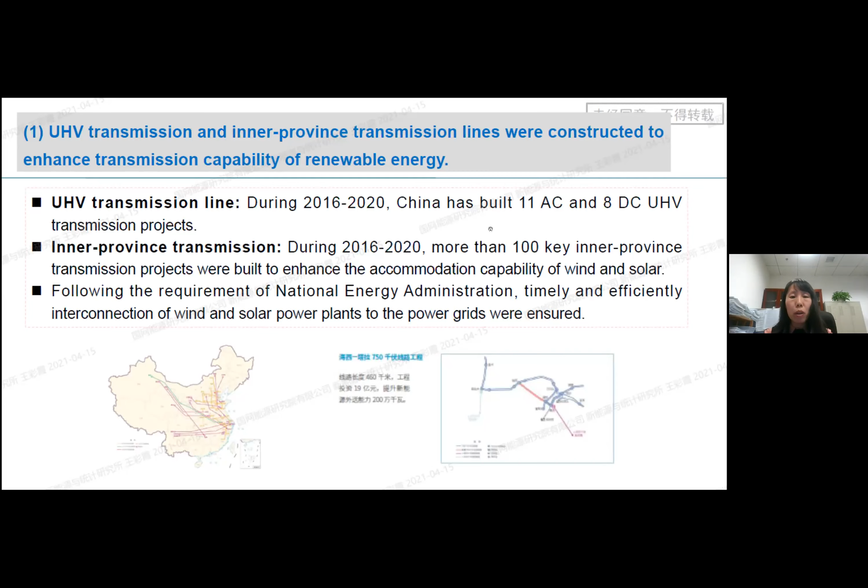Now, by the end of 2020, 51% of wind are located in North China, East China, and Central China. And for solar, this share is higher: 64% of solar is located in North, East and Central China, which are the load centers in China.

The energy share of wind and solar in China by the end of 2020 is 9.5%. Actually, this share is higher in the State Grid operation area. In the State Grid operation area, this share is 10%.

In 2020, the utilization rate of wind and solar has reached 97% in China. Actually, this is a big improvement from the conditions 4 or 5 years ago. In 2016, we had very severe wind and solar curtailment in some provinces in China, especially Xinjiang and Gansu.

And in 2020, this condition has improved a lot. For the first time, the wind and solar utilization rates in Xinjiang and Gansu have reached 90% and 95% respectively, and this was 80% or even lower 4 or 5 years ago. Now the wind utilization rate is 97%, and for solar it is a little bit higher, 98%. So the above is the current status of renewable energy development in China.

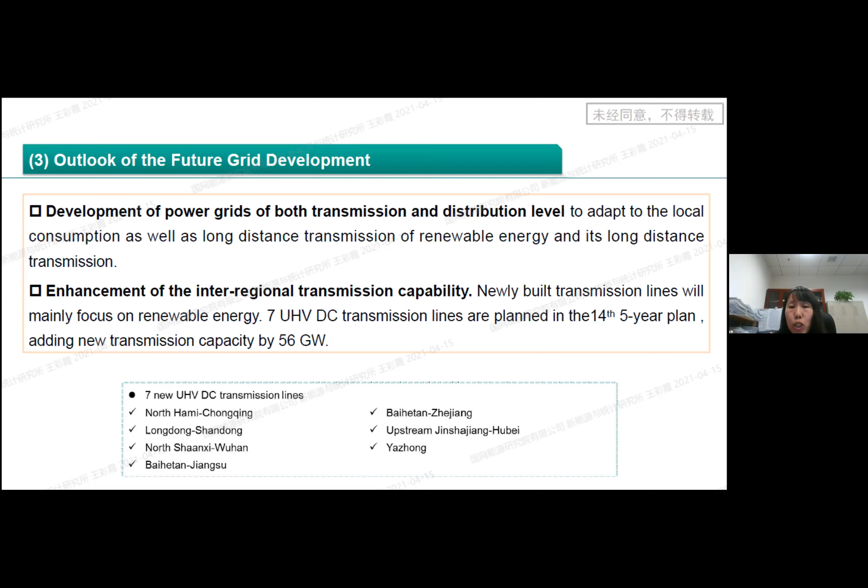We look at the market in 2 aspects. One is the interprovincial electricity market, which is to trade renewable energy in a larger scale. In the SGCC area, the total amount of wind and solar traded in the interprovincial electricity market in 2020 was 91.5 terawatt hours. It's mainly traded in the long-term market, and a very small portion of them is traded in the spot market for renewable energy. So the long-term market here in China is mainly the yearly, seasonally, monthly market like that.

And the other part is a provincial electricity market. And we have around 95 terawatt hours of wind and solar being traded in provincial electricity markets in 2020. So it's mainly through direct trading between renewable energy and electricity consumers, and through generation rights trading between thermal generators and renewable energy.

For future power grid development, as we all know, President Xi announced that China will aim to have CO2 emissions peak before 2030 and carbon neutrality before 2060, and we will have wind and solar capacity of over 1,200 gigawatts by 2030. So we can anticipate that in the future, there will be faster and larger scales of renewable energy development in China. Of course, this will bring challenges to the power grid.

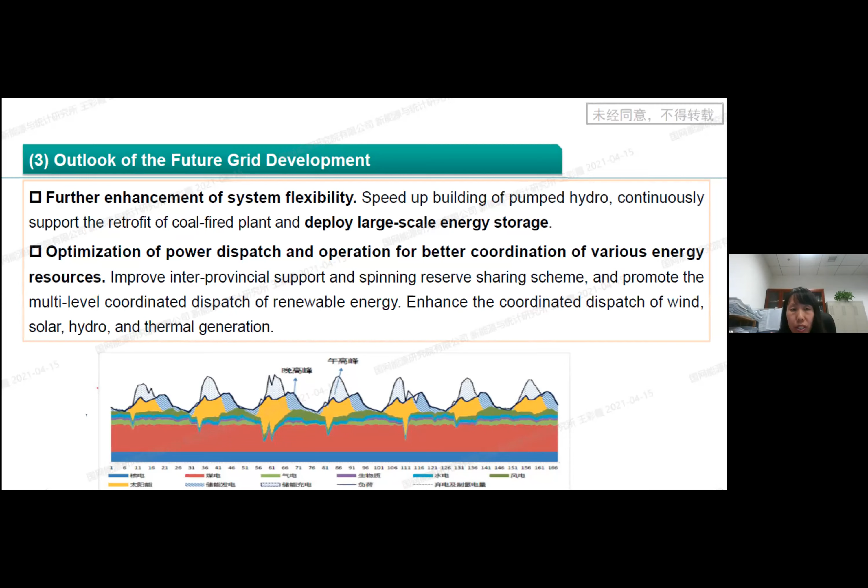Here, I summarize those challenges in 3 aspects. One is to ensure the secure supply of energy in the system. As we all know, wind and solar have this characteristic of variability, right? And in recent years, we have had some extreme weather, so we have extreme high load during the summer and winter. So how to secure supply of energy is a big issue.

And so the second challenge is to ensure the security of power system operation. And the third one is to ensure efficient utilization of renewable energy. Can we also guarantee 90% or 95% or higher utilization rates of renewable energy in the next few years? So this is also a big challenge.

For the future power grid, actually, the State Grid published its action scheme on how to achieve the 30-60 goal in China. And some of those future power grid development aspects I put here are in that scheme. One is the development of power grids at both transmission and distribution level to enable the local consumption of renewable energy as well as long distance transmission of renewable energy.

Second is enhancement of the inter-regional transmission capability. Actually, 7 ultra-high voltage DC transmission lines are already planned in the 14th five-year plan, and this will add new transmission capacity to the system. And the third one is to support the development of distributed energy resources and microgrids, as we could also anticipate in the future, distributed renewable energy will be a big part of the renewable energy future. So the power grid should enable them to be utilized in a more intelligent way in the system.

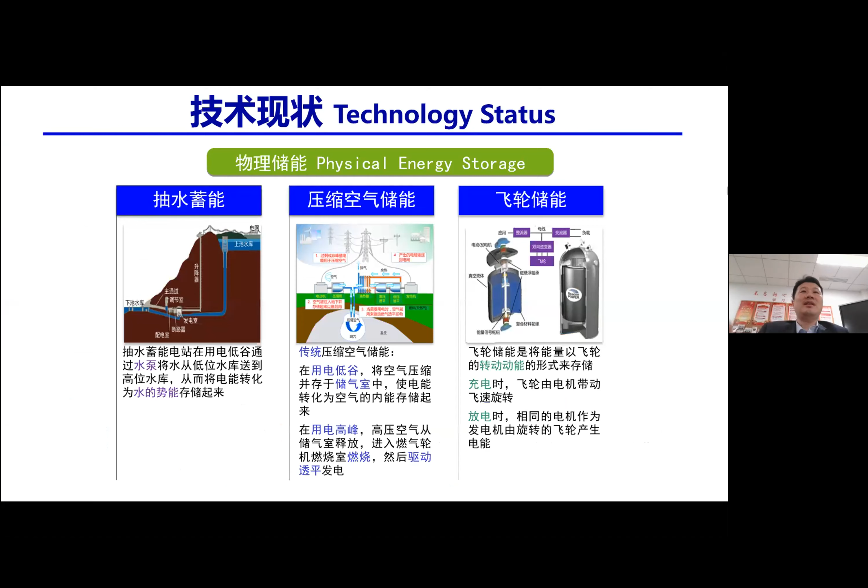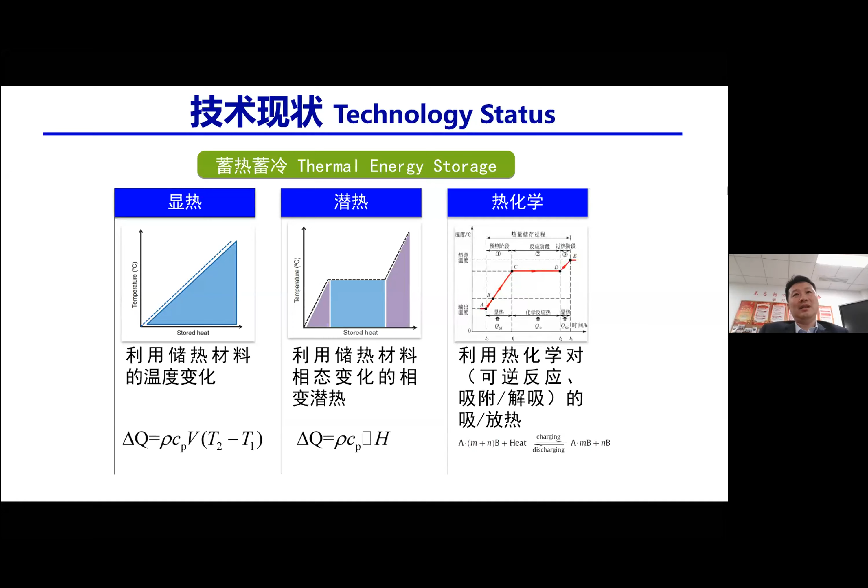So I will deliver my presentation in Chinese. There are 5 parts in my presentation: introduction, technology status, application status, and also the development trend in China, and then some concluding remarks. So first, the background information of energy storage. This is the definition of energy storage. Energy storage, by its name, refers to a process of storing energy via some medium or devices.

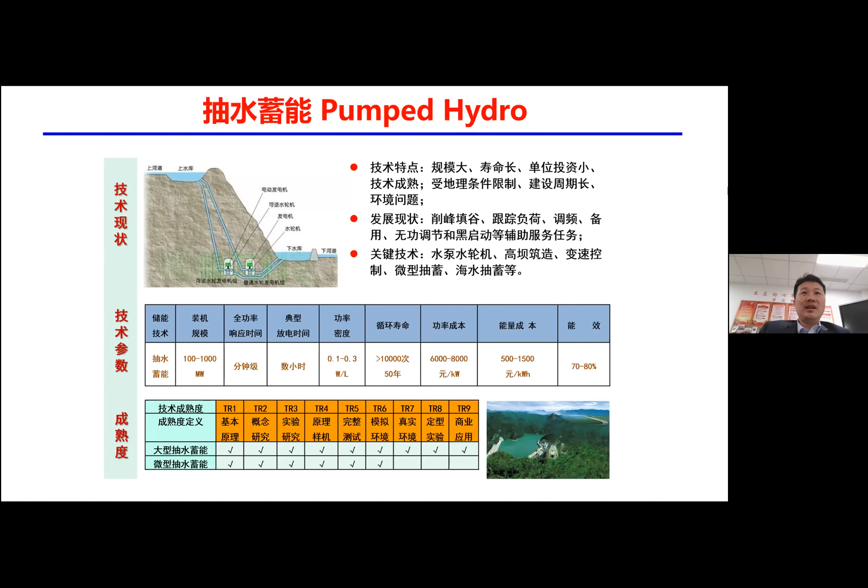Energy storage has a broad and also narrow definition. In the broad sense, it refers to all forms of energy. And more specifically, for electricity storage, there are 2 types of technologies: physical and chemical. For thermal energy storage, it refers to 3 types of heat storage: sensible heat, latent heat, and chemical heat storage. Needless to say, energy storage is very significant. It's a technology of strategic importance.

We know that since the 3rd industrial revolution, with the introduction of renewable energies, we will see higher demand and need for energy storage. First of all, we have more mobile devices, which will create huge demand for energy storage. In the past decade, globally and also in China, the number of mobile devices has been growing exponentially. Over 10-fold increase was witnessed in the past decade. So this created huge demand for energy storage.

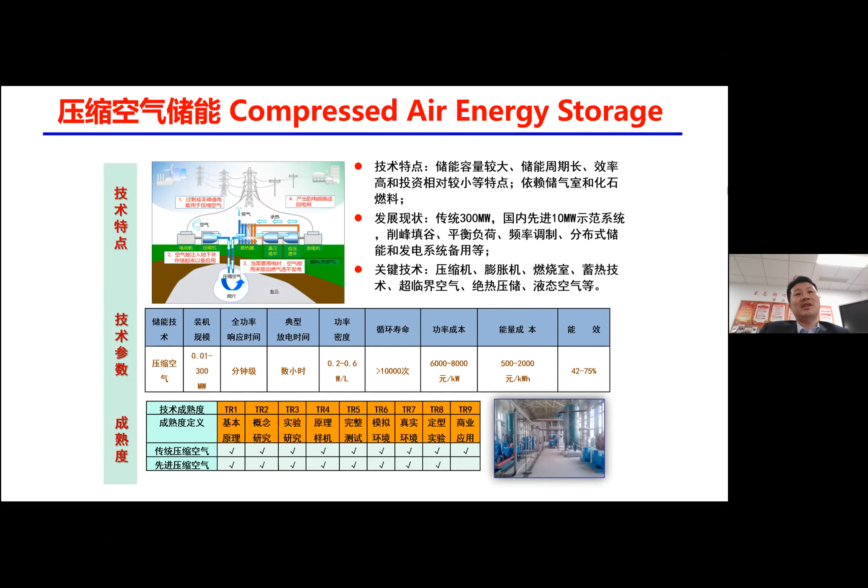Second, electric vehicles and also electric bikes, scooters. Those new devices in the transport sector also increased by a factor of 10 in the past 10 years. Third, the rapid expansion of renewables. In the past 10 years, we have seen the pumped hydro energy storage technology demand also has remarkable progress.

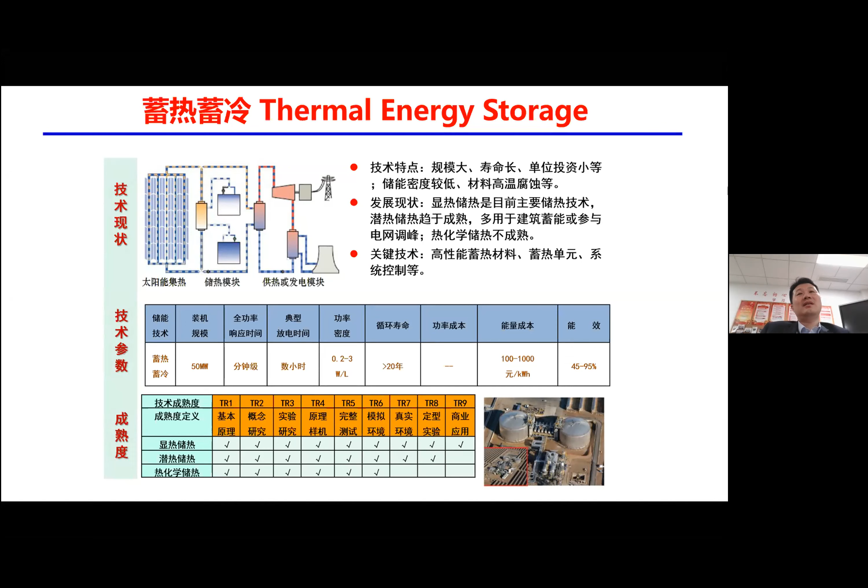Together with the rising installed capacity of renewables, there is an ever-growing demand for energy storage technologies. There are different predictions. I won't go into all the details, but based on different sources, the demand for energy storage technology will grow by over 10 times before 2030.

The technology status in China: these are the physical energy storage technologies, so they don't involve any chemical reactions. Here there are 3 main types of technologies: pumped storage, compressed air energy storage, and flywheel. For chemical technologies, it involves lead-acid batteries, lithium-ion batteries, sodium-sulfur batteries, and liquid flow batteries. So they can be applied to sensible heat, latent heat, and chemical heat storages.

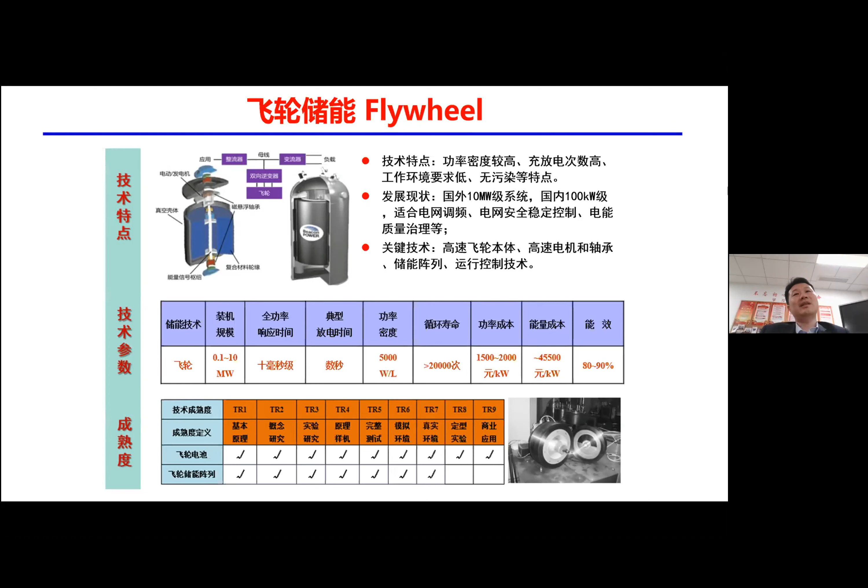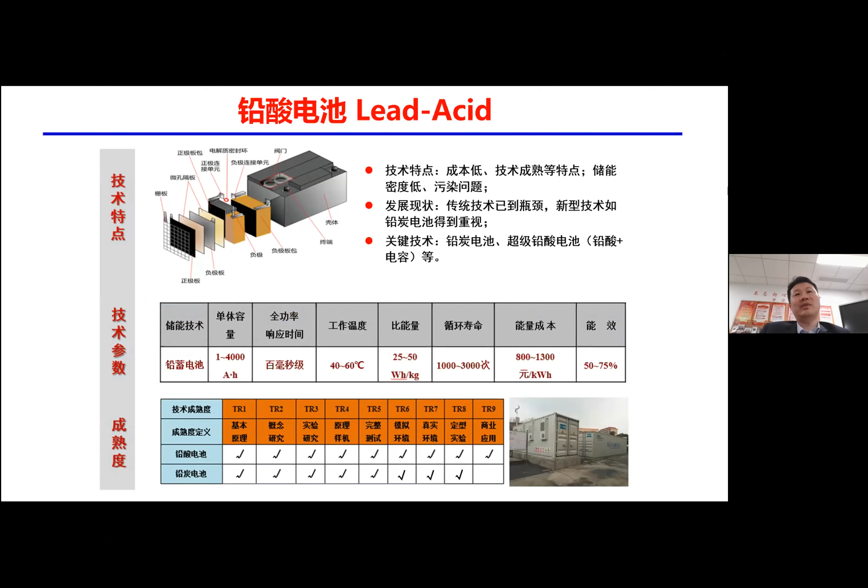The second major category of technologies, compressed air. The benefits: large storage capacity, high efficiency, relatively small investment. The drawbacks include the consumption of fossil fuels and also the dependency on air chambers. In China, we have some demo projects on 10 megawatts. We are piloting 100 megawatt level compressed air energy storage. It is estimated that by the end of this year or early next year, we will be able to launch the first demo project for compressed air energy storage at the 100 megawatt level.

For thermal energy storage, again, large capacity, longer usage life, smaller unit investment. The weaknesses include lower energy density and also high temperature erosion of materials. In China, we see some applications in construction projects for heat storage and also cold storage in southern China. And right now, it's primarily being used for sensible heat and latent heat. We have some mature application cases and also some demo projects. Chemical heat storage is still being studied.

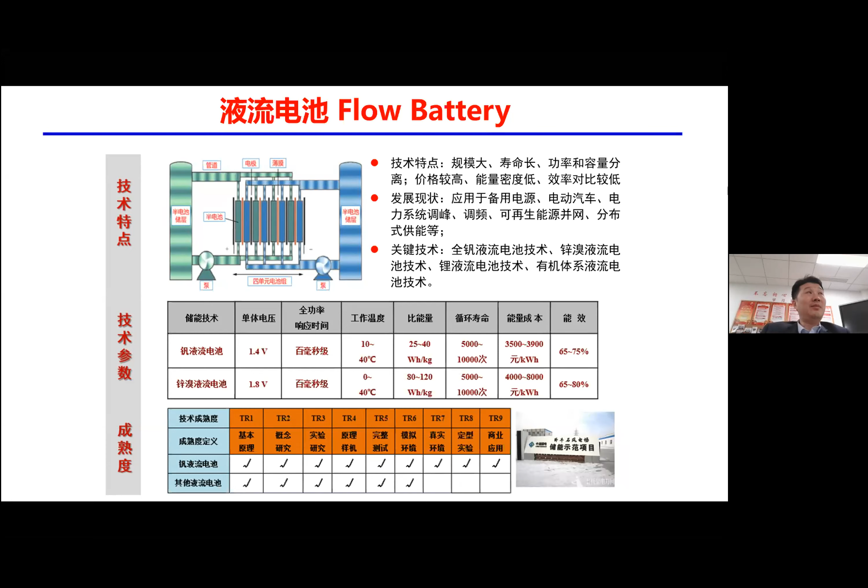Flywheel is a totally different physical energy storage technology. The benefits include high power density, higher number of charge and discharge cycles, lower environmental requirements for operation, and low pollution. Drawbacks: there is some energy loss, because when the flywheel spins, it will reduce energy efficiency.

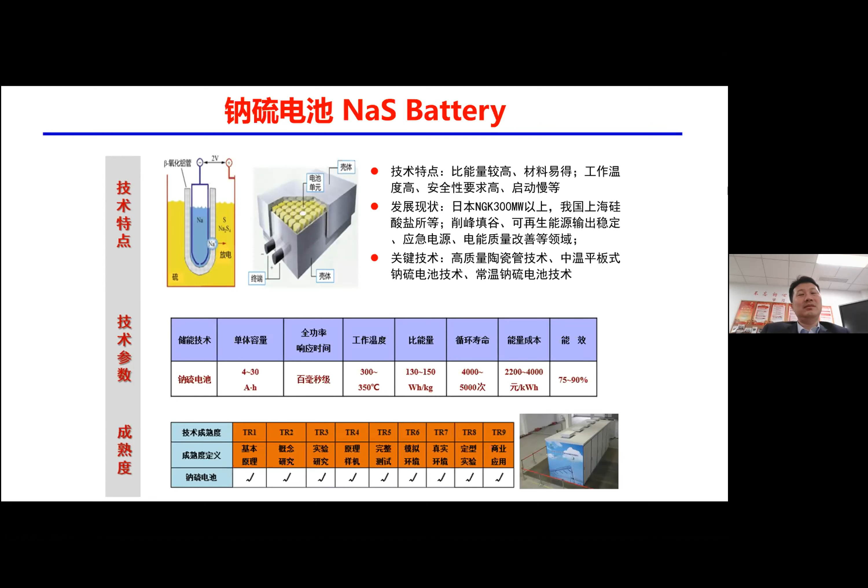For lead acid, the benefits are low cost, mature technology. Weaknesses include low energy density and potential pollution. In the future, China will need to focus on reducing its pollution footprint while enhancing its energy density.

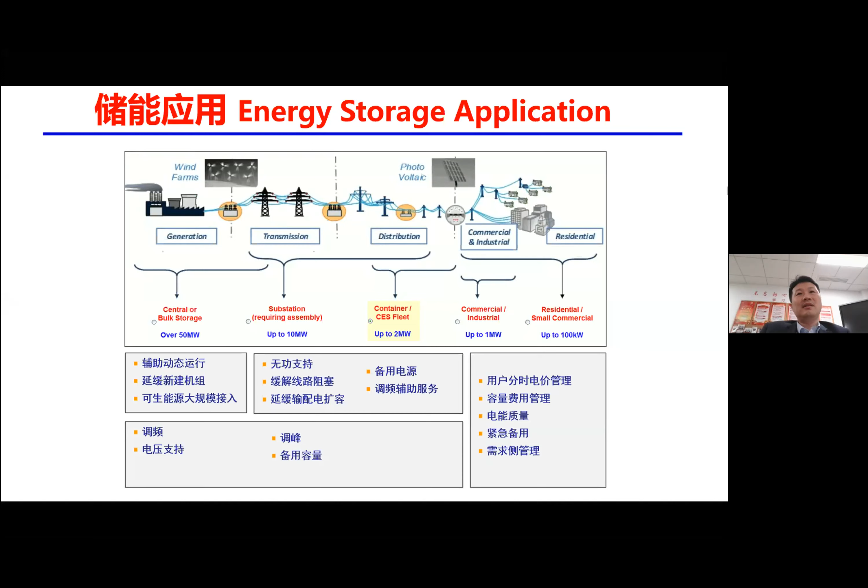Lithium ion, another very mature technology in China: high energy density, efficiency, and quick response time. Drawbacks include high cost and also safety. In China, we have 10 megawatt grade applications. The highest one is around 30 megawatts for demo projects.

If we apply the distributed model, then combined, they can reach 100 megawatt level. For a flow battery, we are also seeing different types of liquid flow batteries in China. The benefits: large capacity, and also long usage life, higher power, and also higher capacity. But the weaknesses include high cost, since it involves rare materials.

So in the future, China will need to work on reducing the cost of vanadium. In China, we already realized the 5 megawatt and 10 megawatt vanadium flow batteries in Liaoning province and also in Dalian city of China.

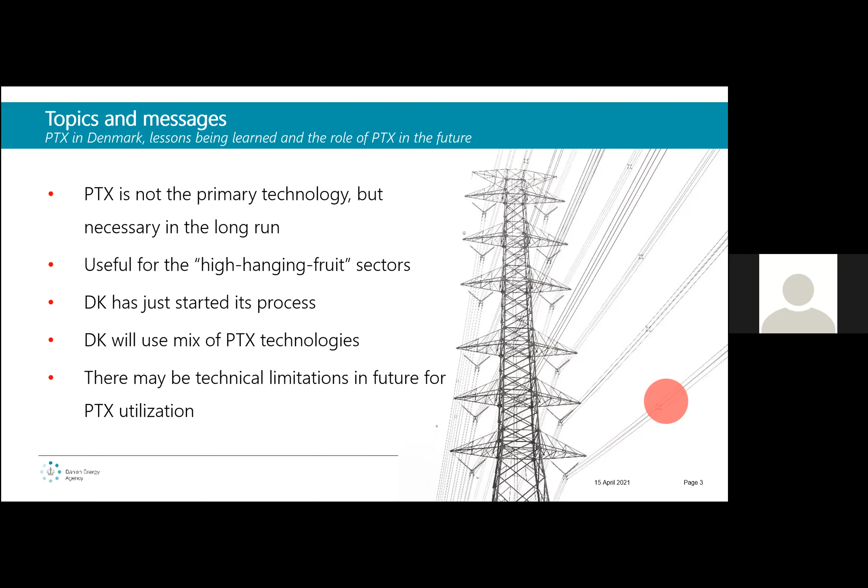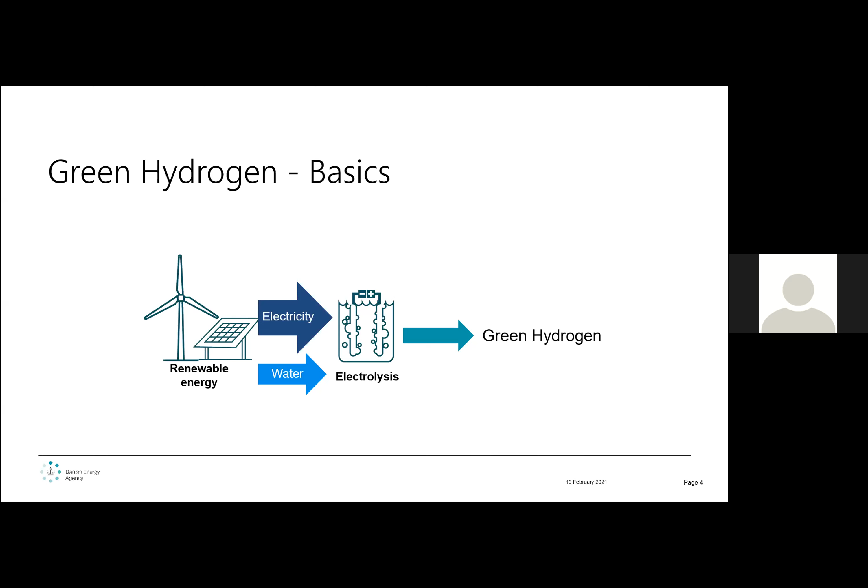Well, thank you very much. We just have to start video. I'm not allowed yet. And as per usual, we just have to get it up. Just for a second. I think you should be seeing my screen now. Can someone please confirm that for me? We can see it, Gregers. That's good. And I presume you can see my face too? Unfortunately, not at the moment, only on slide 2. Okay. I think I'm having a bit of a Zoom issue that happens at times. Give me just 1 second. Gregers, would you also be able to switch to full screen? Yes, I am trying. Can you see my face now? No, I'm afraid not. Okay, we'll do it without my lovely face. You will have to do with slide 2. But do you see my screen in full screen? I do not here in Beijing. It's still not full screen. Should be better now. Perfect now, yeah. Yes, thank you. Apologies.

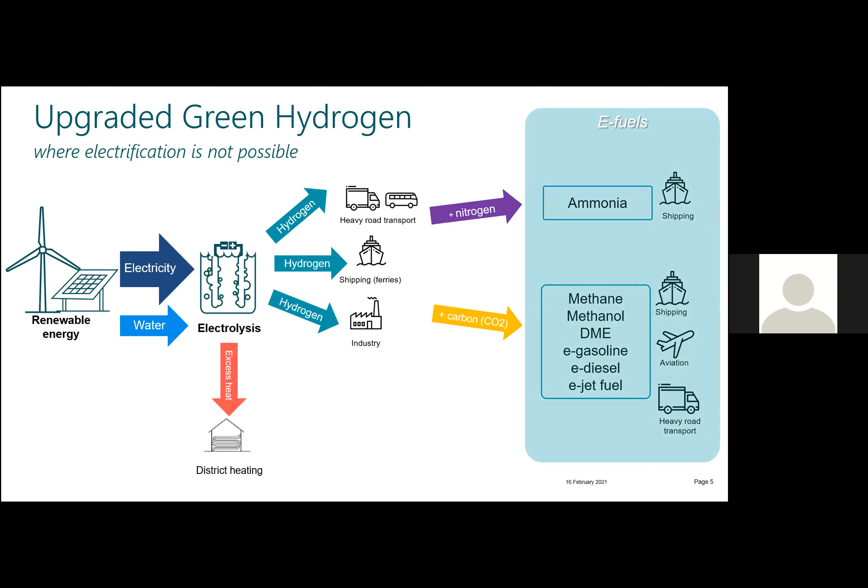Nǐmen hǎo. I am, as Sune said, Gregers from the Danish Energy Agency. And I will speak a little bit to the Danish PTX strategy concerning mostly electrolyzers and how to use that on the demand side. So just to be upfront, the top message is that Power-to-X is not a primary technology. It's not what we are most concerned about, and neither do we think we should be, but it is a necessary technology in the long run. And that is because it is useful for the high-hanging fruits, where we are usually talking about energy efficiency and direct electrification as being lower-hanging fruits that should immediately be changed. There are some sectors, which I will cover in a second, that are much more difficult, and that's where PTX is really a useful technology.

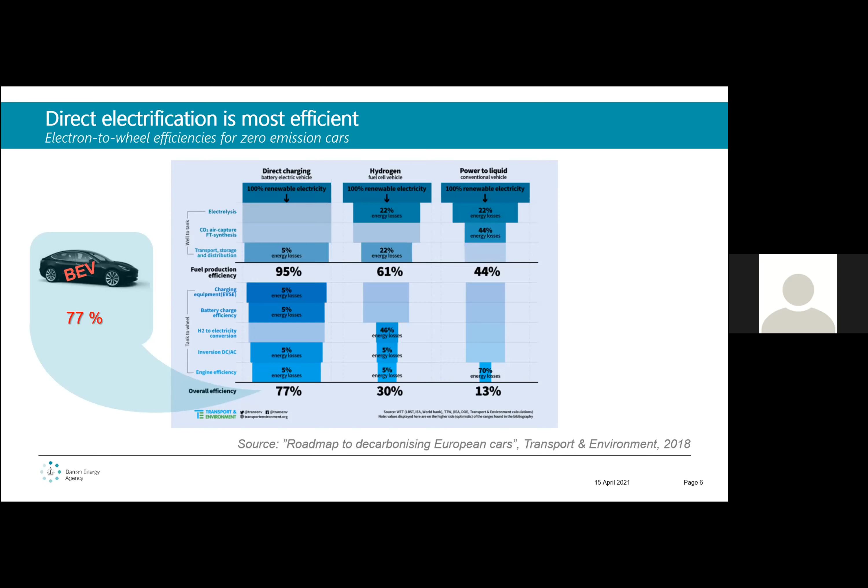And as it is new almost everywhere internationally, Denmark has just started this process, and what is being done, I will cover in these slides. And I will also cover how we are using 2 primary technologies, where there has been a discussion mostly between the EU and China on which one should be used. And the Danish interpretation is both, but we'll get to that. And then we will also talk very shortly about some of the technical limitations of PTX utilization in the future. So let's get into the details.

So just to cover the basics, when we are saying green hydrogen, we are talking about renewable energy, specifically VRE. Sorry? I think someone is not muted. It's okay.

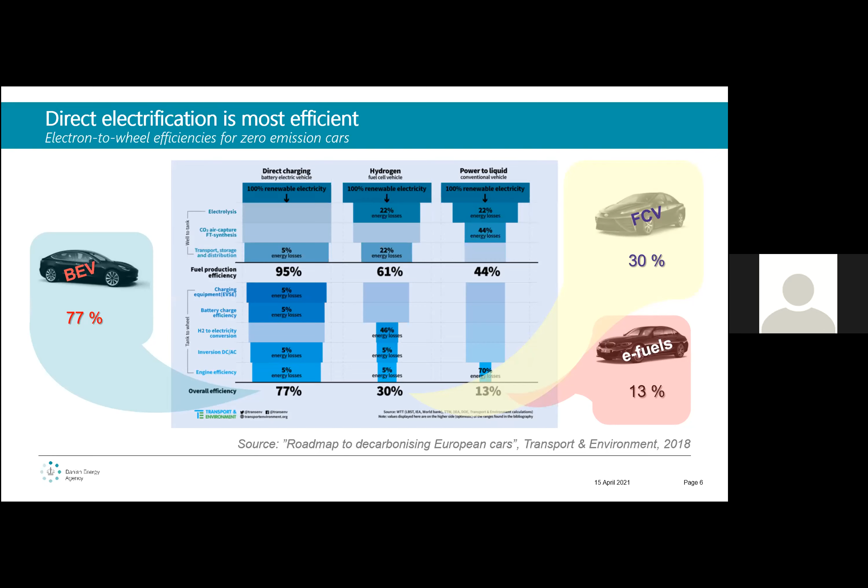That uses water and electricity, of course, through some type of electrolyzers to produce green hydrogen. And that green hydrogen can be used for both heavy transport and shipping, mostly in very short distance shipping. There are a lot of industries that can directly use it as energy, but also as an alternative to natural gas or even coke in some heavy industries. And then electrolyzers, fortunately and unfortunately, produce quite a lot of excess heat at about 80 degrees. So that is useful for excess heat district heating.

And furthermore, having this pure, high quality hydrogen, we can mix that with nitrogen to create ammonia, which is very useful for long distance shipping. And we'll get into that; Denmark has a special interest. And also we can actually mix that with existing CO2, meaning carbon dioxide, to produce e-fuels such as methane, methanol, DME, and different kinds of fuels similar to fossil fuels, but actually made green. And these are generally spoken of as e-fuels. So that is where the situation is in terms of the technology and its usefulness.

And the reason why we are not full in, or we don't consider PTX as the most primary technology, is because we have a high difference in end-to-end efficiency. If you take something like cars, we have battery electric vehicles, as you are well known in China, they have quite high efficiency end-to-end because of the overall efficiency of just producing electricity and transporting it directly into a battery with few losses. So the overall, we could say, electron-to-wheel efficiency is about 77%, assuming 100% renewable energy.

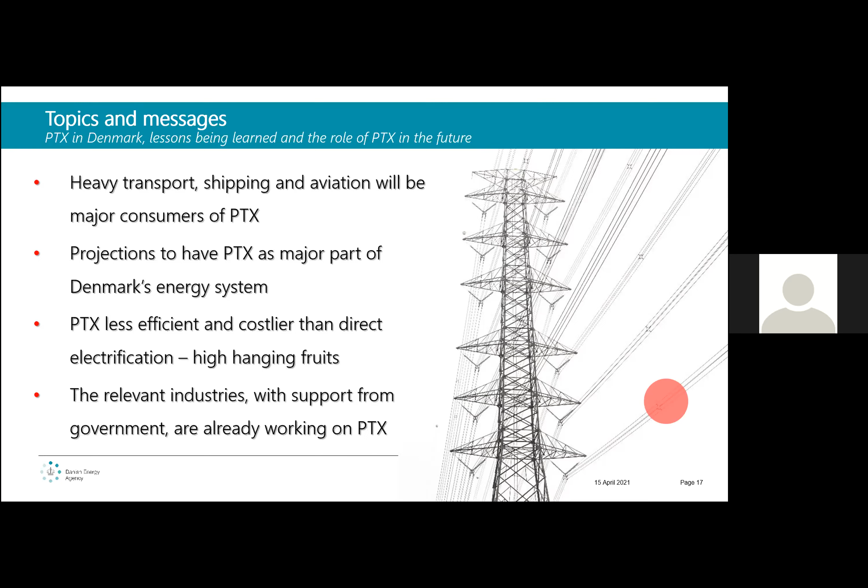We have Shell oil company wanting to make further investment into PEM for use in refining, simply making green fuels in an already existing refinery spot near good power lines. And then we have some local PEM for transportation, mostly big transportation. And then of course Ørsted and Partners that for now will make a 2 megawatt electrolysis for transportation and are further expected to invest quite a lot. And all of these are government supported as of now, because it is a new market, of course.

So ambitions in Denmark: PTX will grow to become a very significant sector in the industrial and fuel sector. And so you see, as we are where we are in 2021, we haven't actually laid ground for the first PTX industry yet, but that will come in 2022 and 2023, and it is expected to grow very rapidly until 2040, where our analysis goes to. For reference, in 2030 that's 1 gigawatt of electric capacity, and in 2040 it's 3 gigawatt of electric capacity. And in 2040, the electricity demand from PTX alone will constitute what in today's terms would be about 8% of the total energy consumption in Denmark.

Now, of course, this seems quite large, but we have to remember this will also supply quite a big part of Denmark's energy supply for heavy transportation and shipping, which then puts it into perspective as being a quite useful technology, and will replace especially heavy fuel oil and diesel in the system. So we're quite happy about these ambitions. So just to wrap up, heavy transport, shipping and aviation will be the major consumers of PTX. These are the high hanging fruits, so to speak, that still need to be plucked. These are the places where we have the most difficulties making things green.

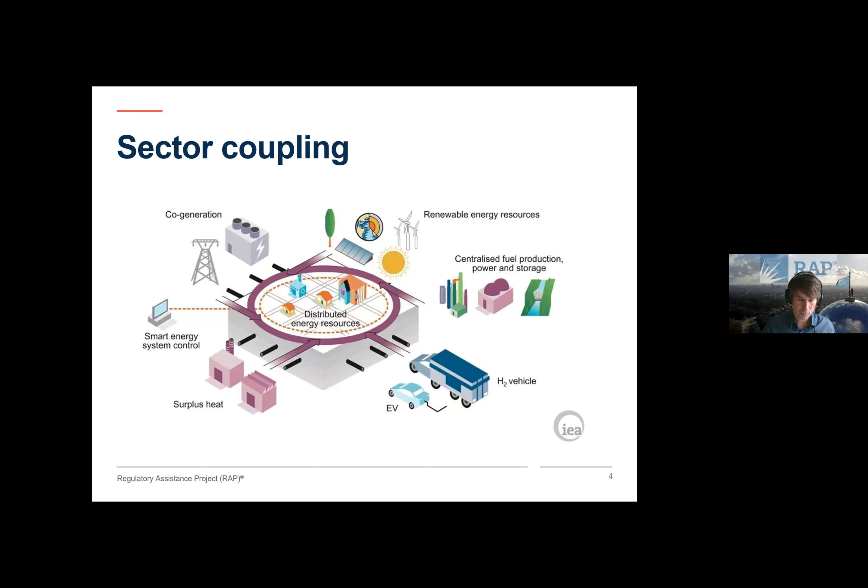Later on. I think my presentation will be quite complementary to what we already saw this morning. I'll be looking at the role that electrification, and in particular the demand response from electrified transport and heating, can play in the new electricity system of the future, and talk a bit about how that can be promoted.

First, a couple of words about the Regulatory Assistance Project. For those that don't know us, we're an international NGO. We're independent and we advise regulators and other energy stakeholders in setting up regulation to accelerate the energy transition. We're all utility or environmental regulators, experienced energy professionals, and we're active in the most important power markets in the world, the US, Europe, China, and India.

And we have been very fortunate to be able to work in China as well for more than 20 years now, showing some recent publications that we've done on the power sector reform in China, and also collaborated with some of the distinguished colleagues here today on the webinar. So I hope to be able to share some of our experience on the topic of today.

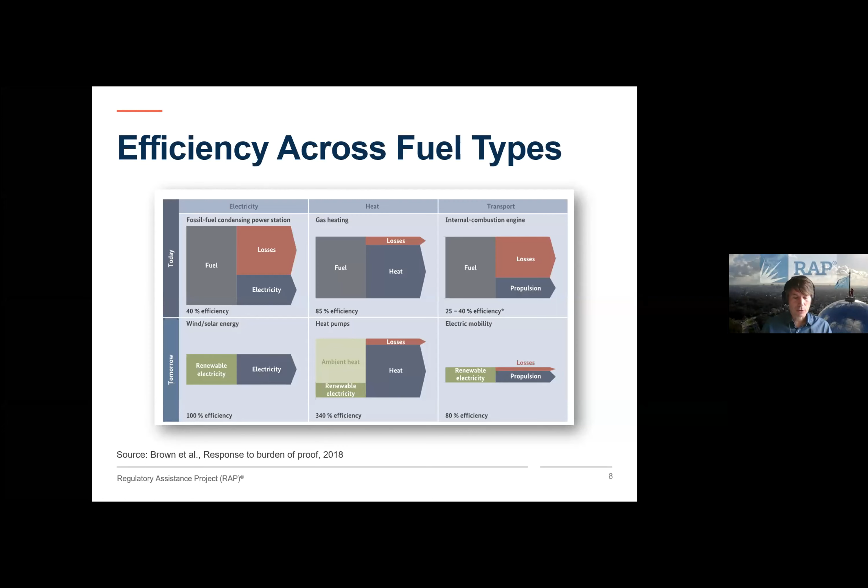And that's, of course, unfortunate, first of all, because of the energy inefficiency and the resource inefficiencies, but of course it also means a waste of money. In the energy system of the future, where electrification will become more and more important, we will see that go hand in hand with very dramatic improvements in efficiency. Renewable electricity generation from wind and solar have almost no losses in converting their resource to electric output.

The most dramatic example is in heating, where compared to an 85% efficiency of a traditional gas condensing boiler, heat pumps have a much higher conversion efficiency using ambient heat from the atmosphere or from the underground to useful heat for building heating or for cooling in the summer, with, depending on the exact technology, efficiencies of 300 to 400, sometimes 500%. And then transport, where electric vehicles have, of course, a much higher efficiency than traditional gasoline or diesel cars.

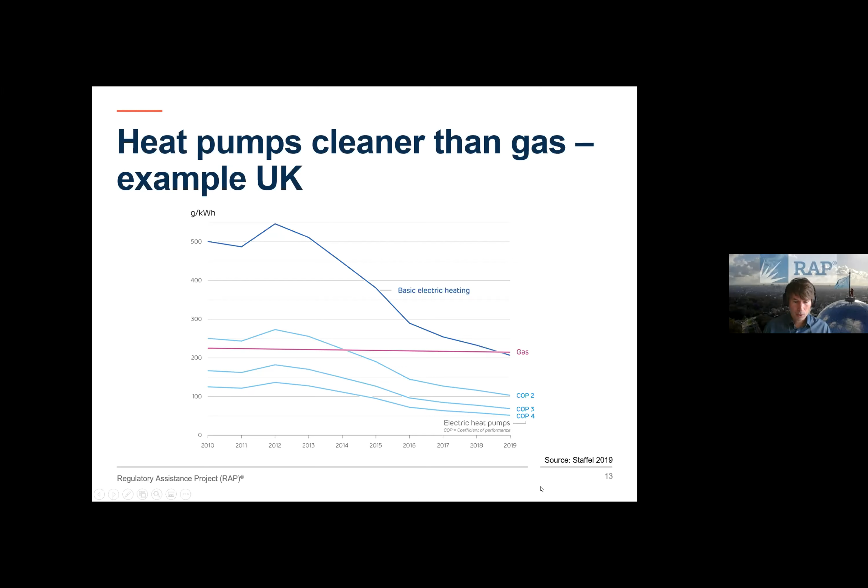And 2020 was the first year where across the year the renewable energy share in electricity generation was higher than the fossil fuel share in the European Union. Of course, I'll immediately admit that 2020, because of the corona pandemic and associated economic downturn, was an exceptional year with very low demand. Nonetheless, we do see that the trend is towards higher shares of renewables and less fossil fuels. And that's good, that's important.

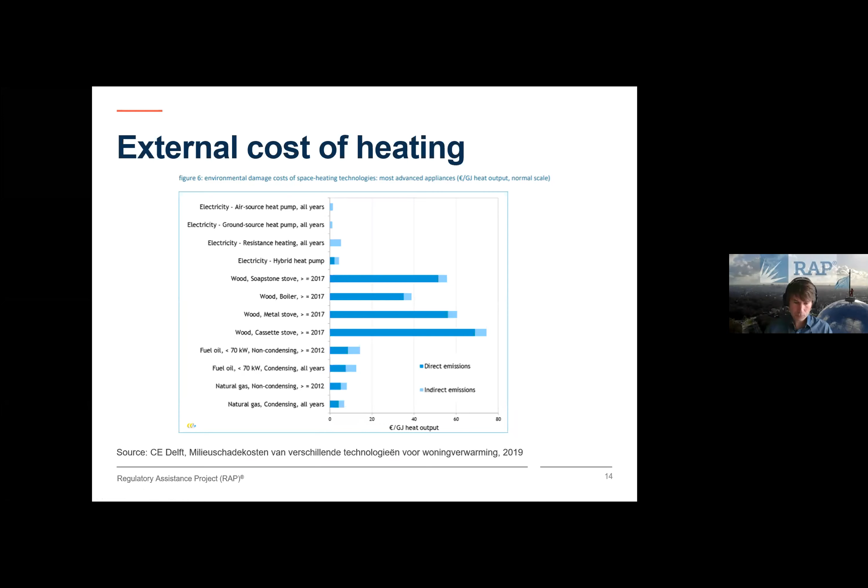And the same holds for overall environmental impact of heating technologies. Shown here is a very rigorous assessment of the external costs of heating. So it's a quantification of the impact of emissions from heating on air quality, human health, and also climate across different heating technologies. And what is immediately clear here is at the top that heat pumps, both air and ground source heat pumps, are the cleanest in terms of environmental damage costs of all the space heating technologies.

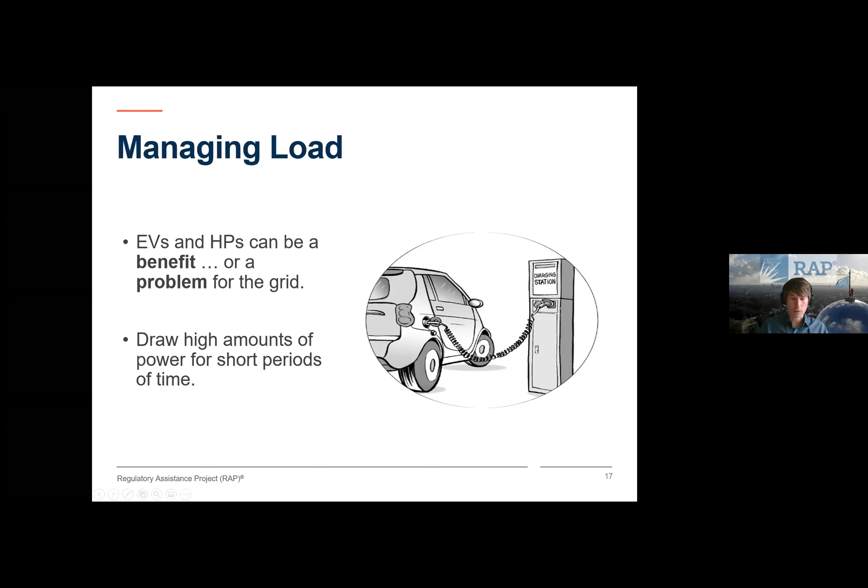And so compare that to the traditional fuel oil and natural gas technologies at the bottom, which are much higher in impact, and definitely all the wood-using technologies in the middle that have a very high air quality impact through the emissions of particulate matter. So, the conclusion from this is that looking at electric alternatives for space heating is also a very important strategy to reduce air quality impacts.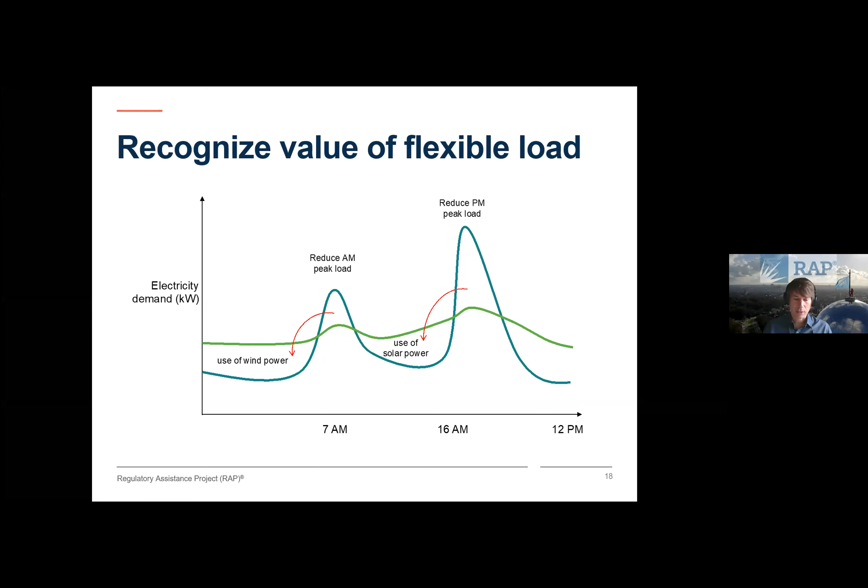Obviously, using electric vehicles and heat pumps means that you draw high amounts of power for a short period of time. I have an electric vehicle myself, and I can see in the platform showing the results of my smart meter what the impact is when we plug in our car, leading to peaks of up to 8 kilowatts for the time that we charge it. So it's really important to try to steer that demand in the direction of it being most useful for the grid. And so it's important to recognize the value of that flexible load.

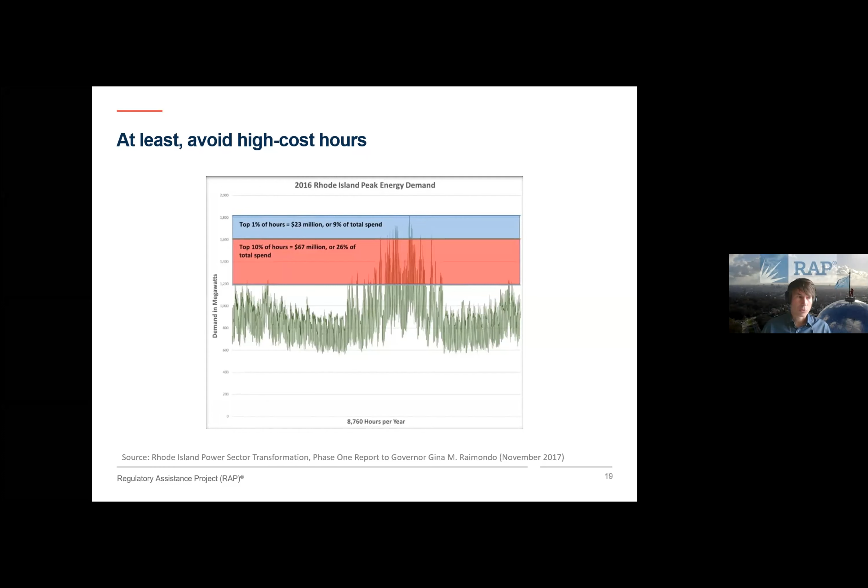Why is that so important? Because it will empower consumers to improve their charging behavior or the use of their heat pump and be in control of it. And it will also help to save money. At present, most electricity consumers will have a flat electricity tariff that doesn't give them any incentives to charge at a specific time. At the same time, we know that, for example, electric vehicles are parked most of the time. Some are parked 21 to 22 hours a day, which leaves plenty of time to charge them at the most convenient time for the grid.

Normally, you need around 3 to 4, maybe 6 hours, depending on the capacity at which you're charging. So you're only needing charging time for a fraction of the time that you're parked. So using price signals will help steer the charging time to the time, for example, when the sun is shining or when the wind is blowing. So that's going to help integrating renewables. It will also help system operators to address challenges with operating the grid safely.

The slide here shows typical load profiles in a system with a lot of wind and solar. And so after the sun is setting, the evening use peak might not be over yet, and you can see very quick ramping up of the load. Shifting some of that load to the time when there is sun or wind power will also decrease the need to ramp quickly. And that's very important for system operators.

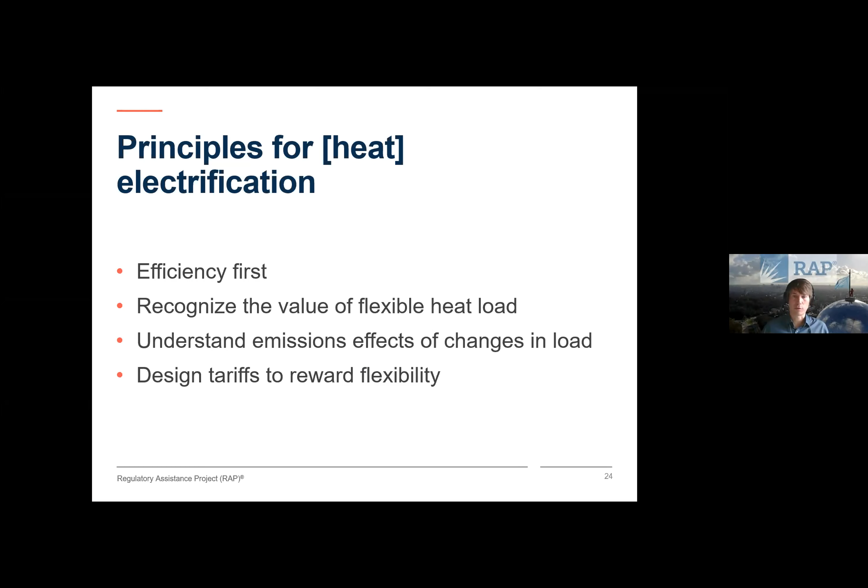This will allow them to not have to use very expensive resources to provide that ramping service. And it's of course also beneficial to the consumers if you can avoid those typically very high cost hours, either because you're on a variable tariff or because the high costs are not being included in the overall rate.

And I know that China is doing a lot of underlying work to create the structures to identify and quantify the high cost hours and send the right economic signals. So this is definitely an effort that should be continued to be able to also better use the clean resources that are available.

Now, once you've identified those expensive and cheaper hours, it's important to design tariffs to reward also flexibility. And really what it's about is that you should use rate design to make the consumer make choices in order to minimize their own electricity bill, consistent with choices that they would make if they would minimize electricity system costs.

So the implementation of time varying electricity rates, both for energy and network use, is going to be really important because it's going to shift the load to cheaper hours and it's going to avoid unnecessary investments. So a couple of examples of that.

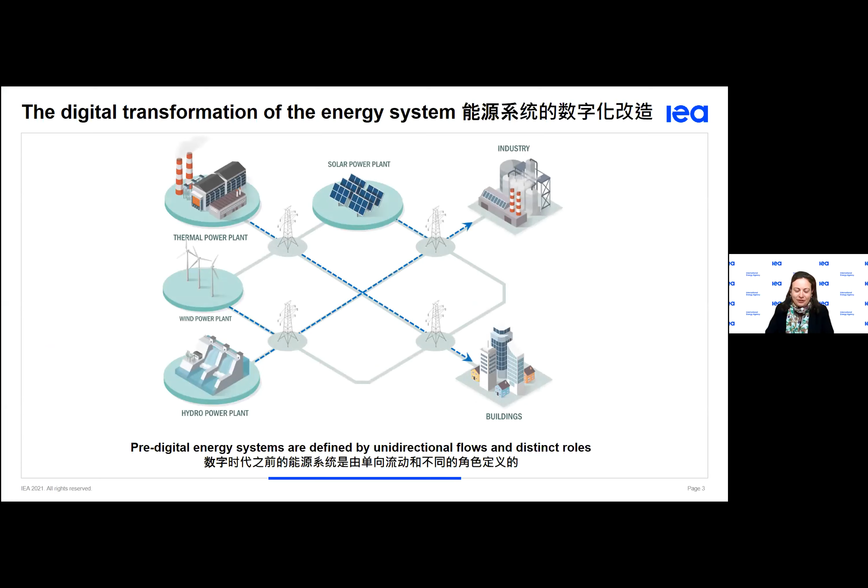Mr. Claes, it is a very, very interesting presentation and a very interesting topic, but we are running out of time. So okay. I will just give you a chance to conclude your presentation very quickly, please. Yep, thank you. And I'm sorry for running a bit long.

Just a couple of examples of time of use tariffs. This is a very simple one for electric vehicles. You can, of course, and we definitely recommend to go to more dynamic tariffs to give more fine-tuned signals. But definitely also realize that this is part of an overall strategy for demand response integration, where pricing is one part, smart technology and smart infrastructure are other important parts.

So to conclude, a couple of principles for heating and transport electrification. Always start with efficiency, but then recognize the value of a flexible heat load, understand the emissions effects and drive to minimize those emissions, and design tariffs to reward flexibility, both for residential as well as commercial and industrial consumers, of course. So with that, I will conclude and look forward to the rest of the discussion. Thank you very much.

Thank you, Mr. Claes, for a very, very interesting and very comprehensive presentation on sector coupling. I really appreciate it. Because we are a bit constrained with time, I will not pose a question for you now. Hopefully, we will have time to do it by the end of the seminar.

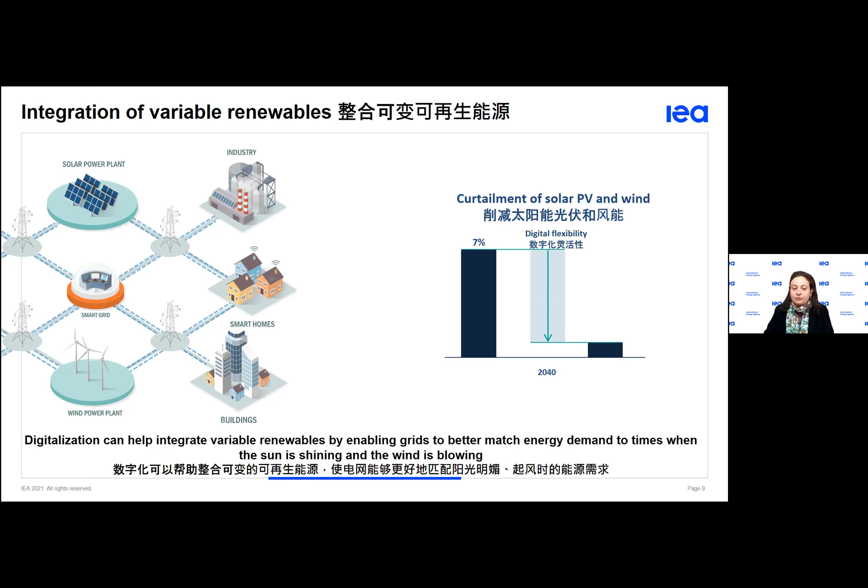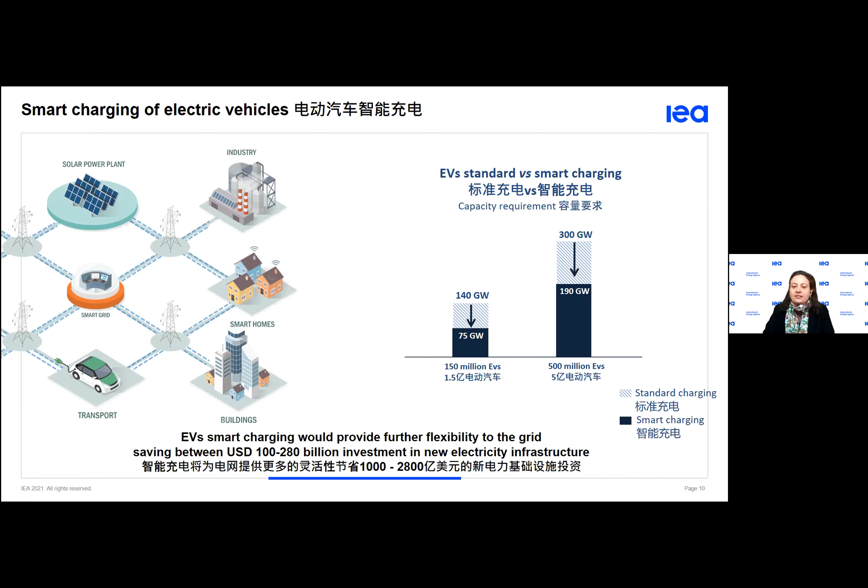Another good news is that we expect many flexibility sources to be available. For instance, the IEA estimates that by 2040, we might have 1 billion households that are connected and 11 billion smart appliances participating.

Sorry, Pauline, to interrupt. I think you're not on the full screen mode. You're on the presenter mode.

Sorry, because in the previous one I could not see my speaking notes, which was a bit difficult. But this one, we can see your speaking notes as well. Okay. So here you see my speaking notes. Well, I will stop share and reshare. Now we see you, Pauline, but not your slide. Sorry. And now? Now it's fine. Thank you. Okay, sorry.